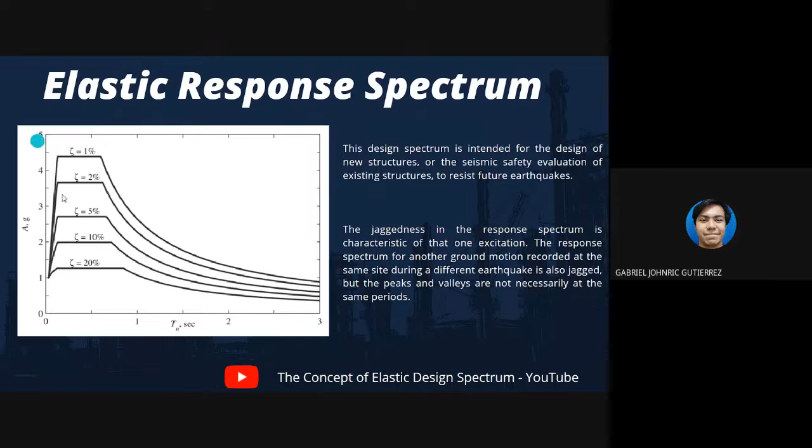So researchers have developed procedures to construct such design spectra from ground motion parameters. The design spectrum should be representative of ground motions recorded at the site during past earthquakes. If none have been recorded, the design spectrum should be based on ground motions recorded at other sites under similar conditions, like magnitude of the earthquake, distance from the site, fault mechanism, travel path of seismic waves, and soil conditions. So the design spectrum is based on statistical analysis of the response spectra for the available ensemble set of recorded ground motions. Statistical analysis of this data provides the probability distribution for the spectral ordinate, its mean value, and its standard deviation at each period Tn.

Kumbaga, sinasabi lang, kung walang na-record na design spectrum sa isang particular site, you should consider these conditions para makapagkaroon ka ng similar or parang simulation na magiging design spectrum na kailangan mo i-consider pagka ikaw ay magde-design ng seismic resistant building. So we should take into consideration these 5 similar conditions. Keep this in mind.

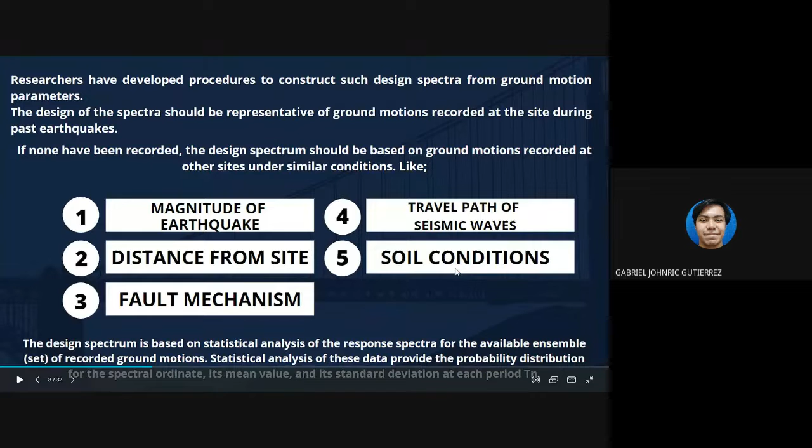Moving on, modern methods for the construction of EDS, or the elastic design spectrum. Modern methods for constructing design spectra are based on probabilistic seismic hazard analysis, which considers the past rate of seismic activity on all faults that contribute to the seismic hazard at the site, leading to a uniform hazard spectrum.

So moving on, the use of elastic design spectrum provides the basis for calculating the design force and the deformation of single degree of freedom systems to be designed to remain elastic. For this purpose, this design spectrum is used in the same way as the response spectrum was used to compute peak response.

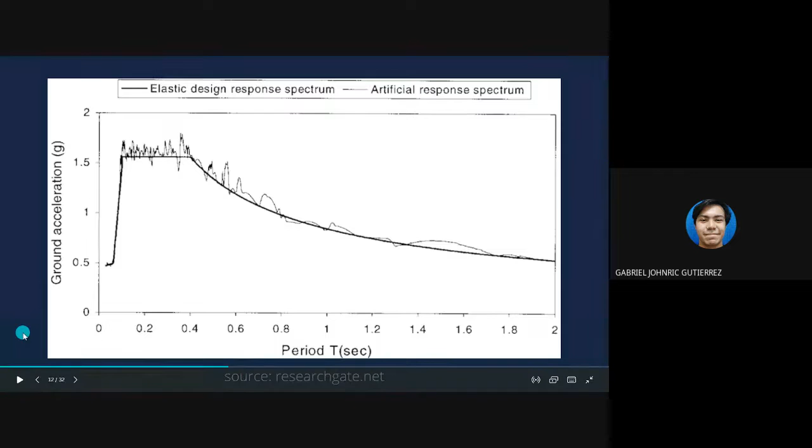Furthermore, ito nakita ko lang sa Facebook pero parang maganda siyang gamitin, galing siya sa Philippine Institute of Volcanology and Seismology or PHIVOLCS. Ito ay nangyari nung nagkaroon ng parang mini earthquake sa Taal Volcano, baga volcanic earthquake siguro. So records of seismic waveform, the left; the frequency spectra, the middle; and the frequency distribution, right - of the phreatomagmatic activity from 11 of 16 seismic stations on Taal Volcano.

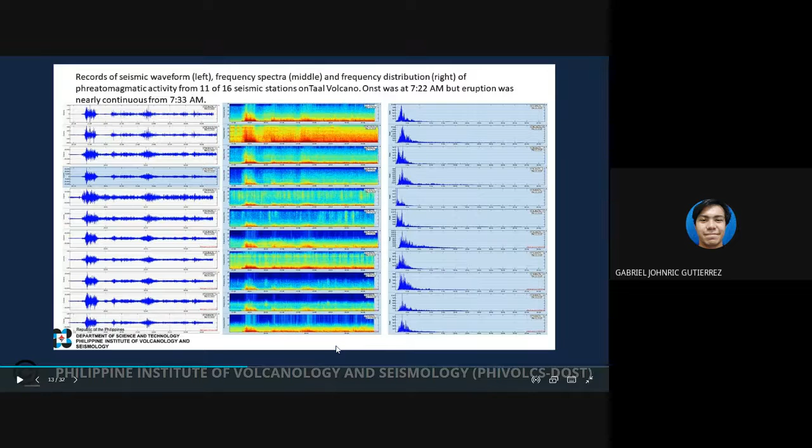Occurred at 7:22 a.m. but the eruption was nearly continuous from 7:33 a.m. Kita niyo naman sa screen na ito yung artificial natin or the response spectrum - i-analyze mo lang yan. Ito ay yung frequency spectra, nasa gitna. Ito, yan, yung seismic waveform natin. Kumbaga importante siya sa design natin ng buildings - i-take and consider natin yung mga record ng past earthquakes, yung mga pwede rin pang future earthquakes, pwede natin ma-predict. This is an example of the frequency spectra, tapos ito yung frequency distribution.

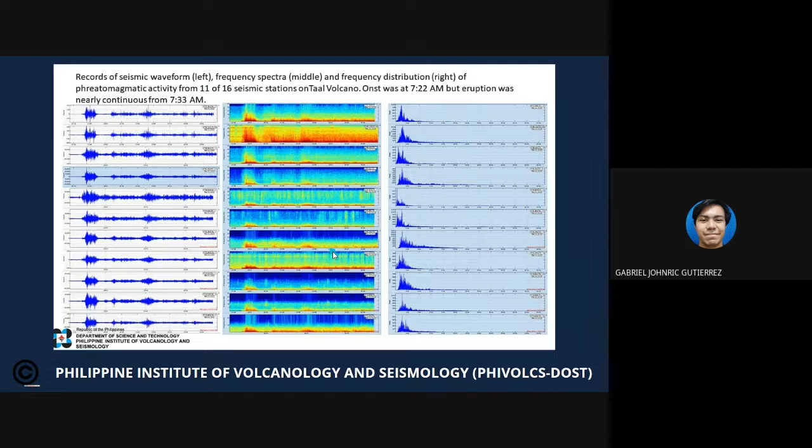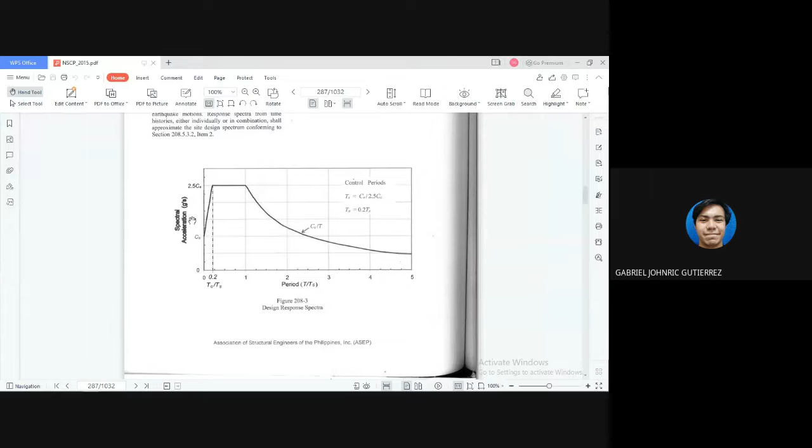Bago ako mag-move on dito sa inelastic spectra, kumbaga yung elastic design spectra or response spectrum, makikita din natin sa ating NSCP 2015. Sana nandyan pa kayo. Saan ba yun? Ayan, NSCP 2015, yan, the design response spectra, spectral acceleration - yan yung sinasabi ko kanina. Ito lahat i-consider natin pag magde-design tayo ng seismic resistant building.

Sa mga time history analysis na discuss ng previous group - mga time history analysis, earthquake loads, yan, i-consider natin to. Meron din mga ganito, pag kailangan natin i-consider... ano pa ba? Saan yun? So yan, yun lang muna.

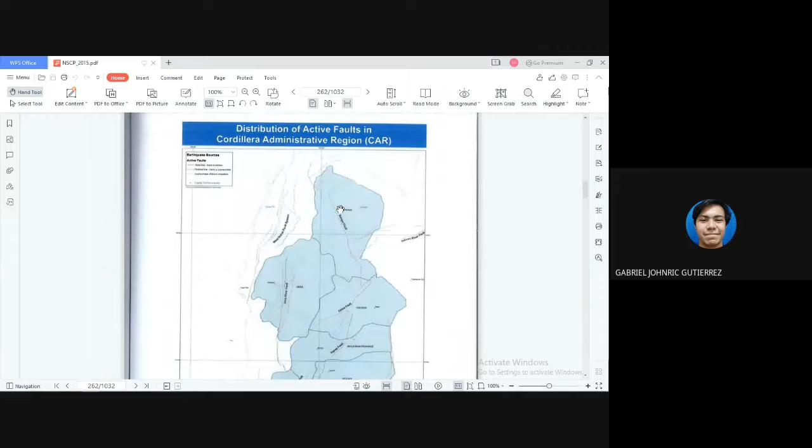Ito pala, baga nasa NSCP na din natin yung mga active faults natin sa buong Pilipinas - distribution of the active faults and trenches in the Philippines. Medyo malabo siya pag naka-zoom out, pero pag ganito yung inisa-isa per region, mas makikita natin, diga, at may legend naman dito. Hindi ko alam kung ano pasa dun. Ito sa region 1, tapos region 2. So puntahan natin yung ating region.

Ayan, region 4A, yun ang Batangas. Di ba lagi naman natin naririnig yung Lubang Fault, diga - pagka nagkakaroon ng lindol malapit sa Calatagan, sa Mabini, diga. Ayun yun ang Batangas City, maliit lang, ayun ang Taal. Ito naman sa region 4B, baliktad nga lang. So region 5 and so on and so forth.

Para to further discuss ang ating discussion, magpe-play ako ng video na ni-record ni Regine Panganiban. She will be talking about ano nga yun - the inelastic design spectra.

Inelastic response spectra or... So rinig nyo ba? The inelastic response... Medyo mahina, pero rinig naman. Sige, salamat. Mahina nga talaga. Oo. I-ano mo muna.

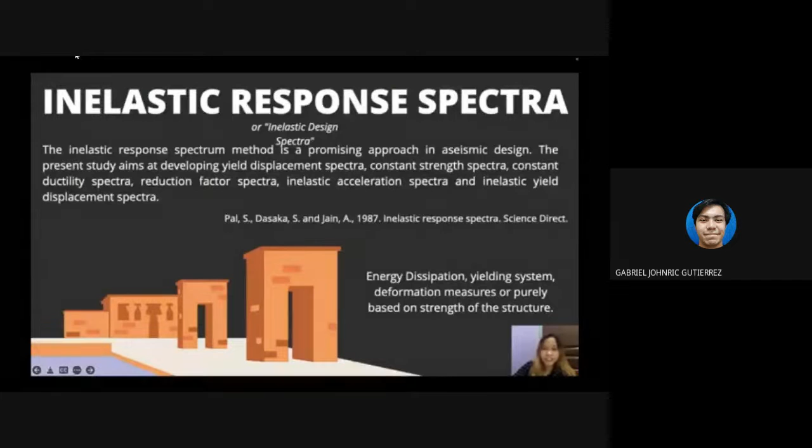Inelastic response spectra or inelastic design spectra. The inelastic response spectrum method is a promising approach in aseismic design. The present study aims at developing yield displacement spectra, constant strength spectra, constant ductility spectra, reduction factor spectra, inelastic acceleration spectra, and inelastic yield displacement spectra.

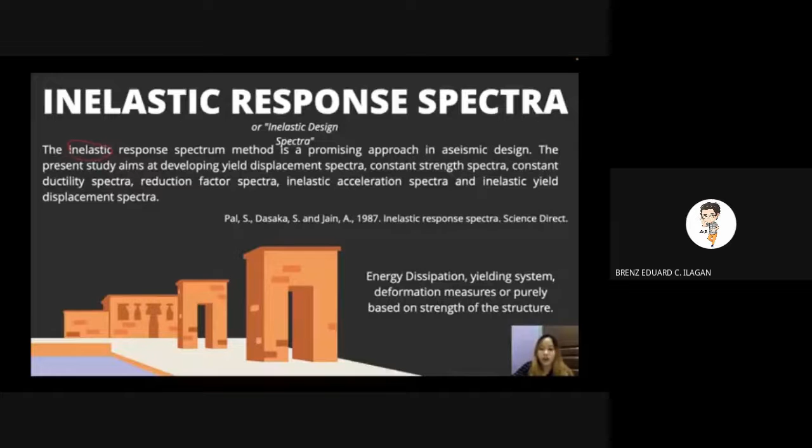So, inelastic defines the material response in relation to the stress-strain diagram that is nonlinear and that retains a permanent strain and does not return to an unstrained state on complete unloading. So next is the basic design objective of seismic resistant design. First is to protect the life safety of the building occupants and the general public. The second is to control the severity of damage in small or moderate earthquakes.

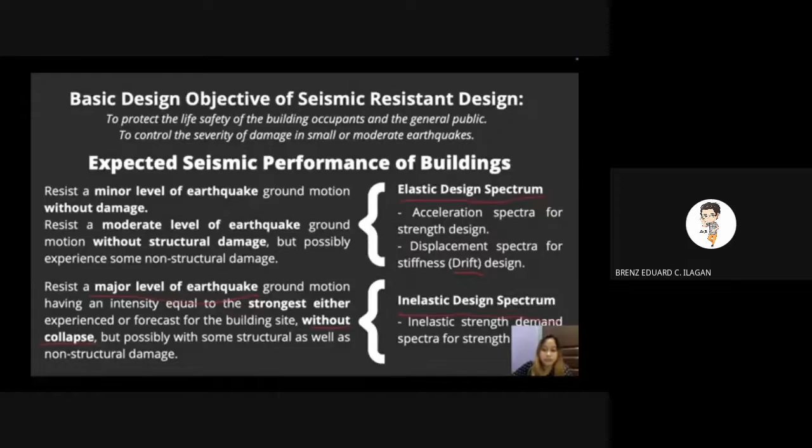So VB in this graph is the peak base shear of the linear elastic system under strong ground motion having a PGA equal to 0.4g. So, starting at the point PGA equals 0.4, the solid black line represents the elastic design spectrum. So, VB is for the linear elastic system under that design earthquake. We normalize VB, sometimes called the base shear coefficient. VB is also called FSO, or F0, which is the elastic force.

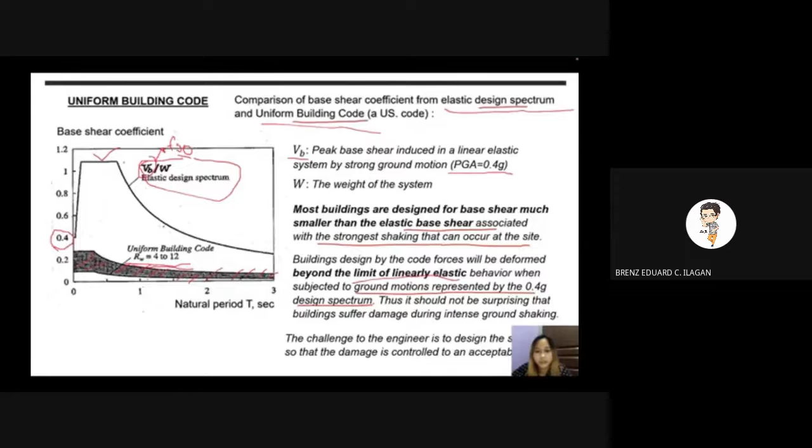Force deformation relationship. During an earthquake, structures undergo oscillatory motion with reversal of the deformation. So, the earthquake excitation will be cyclic, so the structure undergoes cyclic deformation; the effective earthquake forces will be changing direction, and therefore the structure will be undergoing oscillatory motion.

So in an experiment, we apply cyclic force by push and pull on the structure, and then record the force deformation behavior at each step. And para po maintindihan ng behavior, to understand the force on the structure during a real earthquake excitation. So this kind of experiment, sometimes called the cyclic load test, is used for formulating different force deformation behavior, or pagkakaiba ng elements.

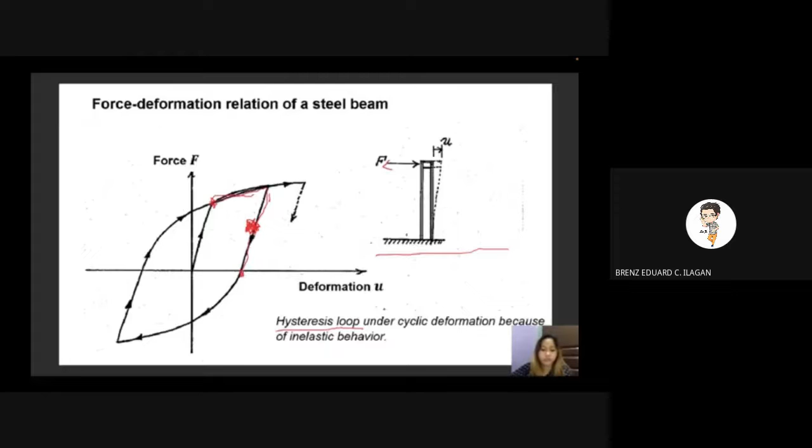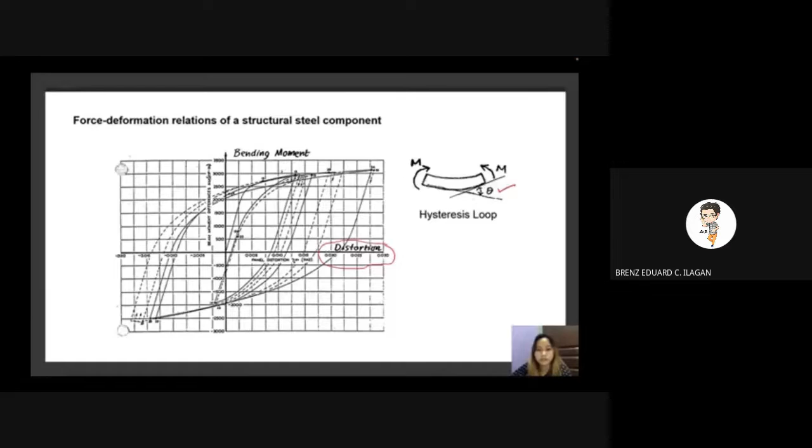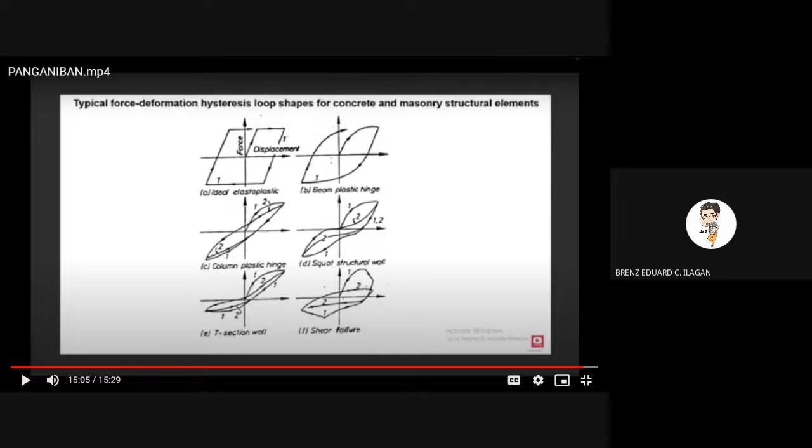So, so yun, wait lang ha. Wait lang po. Sorry. So, dagdagan ko lang yun, sinabi ni Regine.

Wait lang. Dito, so the basic design objective of seismic resistant building design. So, pinaka main concern natin is to protect the life and safety of the building occupants and the general public, and to control the severity of damage in small and moderate earthquakes.

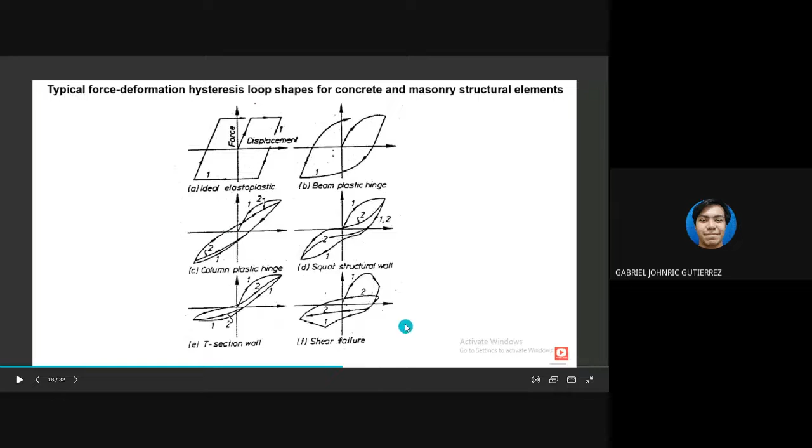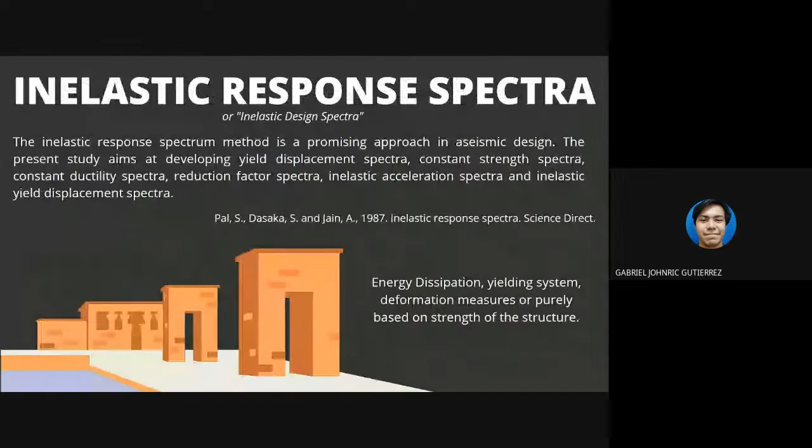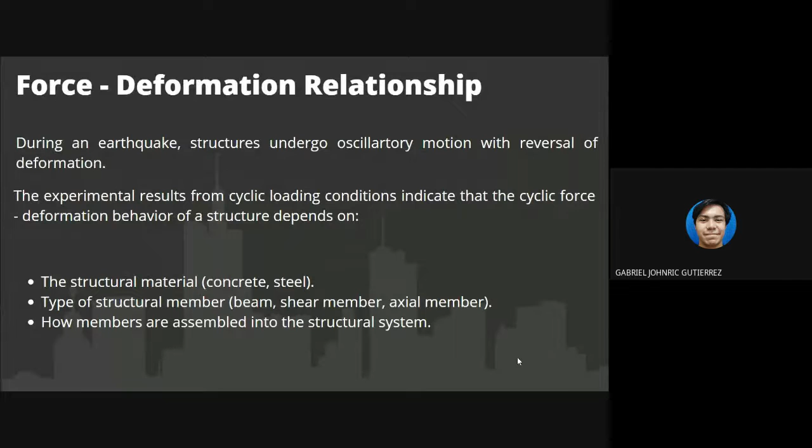Wait lang. Lang po. So yan, so far may tanong ba kayo sa inelastic design at sa elastic design bago tayo magpatuloy? Medyo wala naman, naintindihan namin yung lessons. Yun. Sige, thank you. So, wait lang po. Saan yun? So, ngayon, to discuss the elastoplastic idealization, may I call on Miss Acil to discuss? Miss Acil, nasan dyan ka ba? Sa design option pa ako. Sorry naman. Yan, sige. So, elastoplastic idealization. So, sorry for the inconvenience.

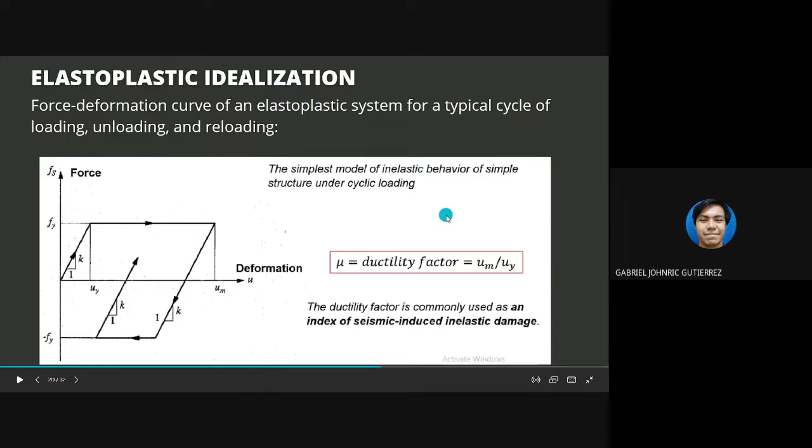So, elastoplastic system and its corresponding linear system having the same K in their initial loading phases. So, yan. Ganito yung diagram ng elastoplastic system. Nagkaroon lang siya ng additional na U sub O. Yun yung corresponding linear system.

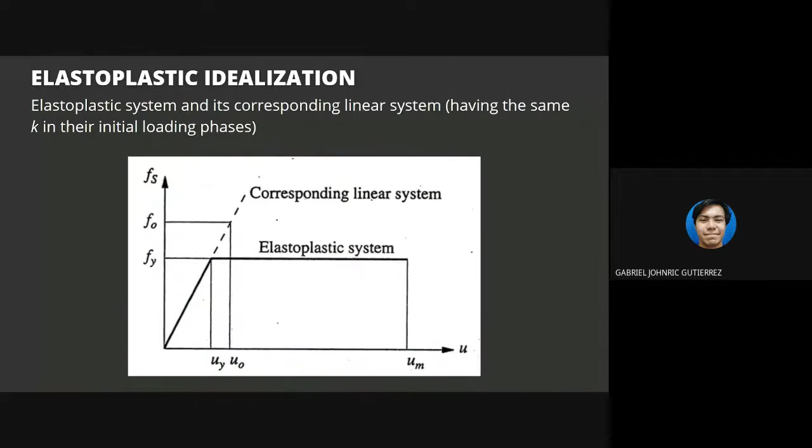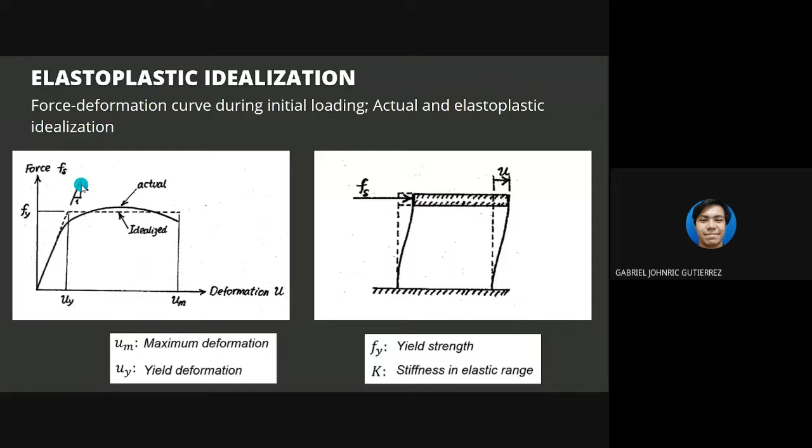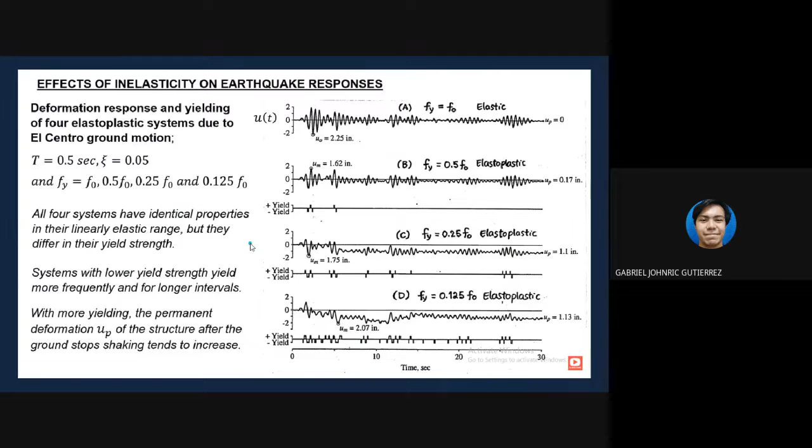For each system, the computed ductility factor μ is the ductility demand imposed on elastoplastic systems by the ground motion. The system should be designed such that its ductility capacity, or the ability to deform beyond the elastic limit, exceeds the ductility demand. So decreasing yield strength, increasing ductility demand. So ganun lang yung kanyang concept.

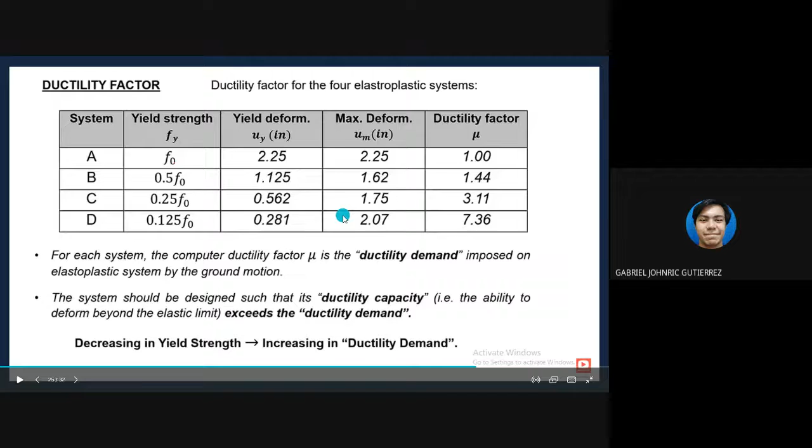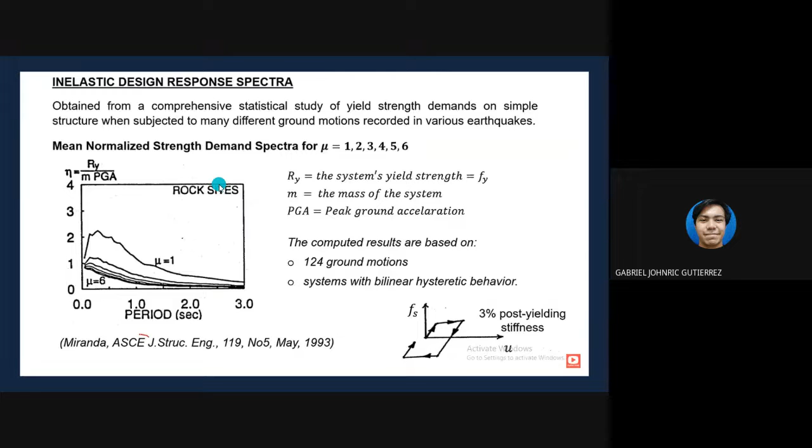So, ito ang period. Dini naman. So design options. A structure may be designed for earthquake resistance by making it strong, by making it ductile, or by designing it for economic combinations of both properties. Ito ay i-discuss ni Miss Aisyl.

So, ayun po. Proceed po tayo sa design option. So, the structure may be designed for earthquake resistance by making it strong, by making it ductile, or by designing it for economic combinations of both of these properties. So, makikita natin na kapag yung mu or yung ductility natin is nag-increase, yung required Fy niya, which is yung yielding strength niya, is magde-decrease. So, meaning, yung structure can be more ductile, yung required na yield niya ay bababa lang. So, we can have economic combination of both properties for any given structure para makagawa tayo ng design.

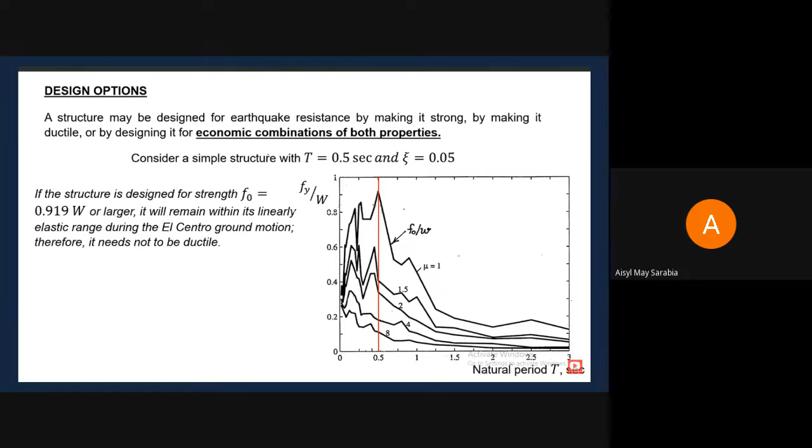So, for example, consider a simple structure with period equals to 0.5 seconds and damping ratio equals to 0.05. So, if the structure is designed for strength F0 equals to 0.9 W, it will remain within its linearly elastic range during the El Centro ground motion. Therefore, it need not be ductile. So, kaya makikita natin na yung mu is equals to 1. Hindi na kailangan ng structure to be ductile kung iseset natin yung Fy to 0.9 W.

So, on the other hand, yung structure can develop a ductility factor of 8. Sabihin natin na yung structure ay gawa sa pagka-ductile na material na kaya masustain yung ductility value of 8. Tingnan natin yung mu is equal to 8. Makikita din natin na yung need na yield strength niya ay very low. So, meaning, ductile structures, their yield strength demand is less. So, structure can be economic combination of the ductility and the required yield strength also.

For example, if the ductility is equals to 2, we can design it with the required yield strength of 30% of F0. So, we can design our structure for high yield strength that doesn't need to be ductile, or more ductile with less yield strength, or economic combination of both properties. Next is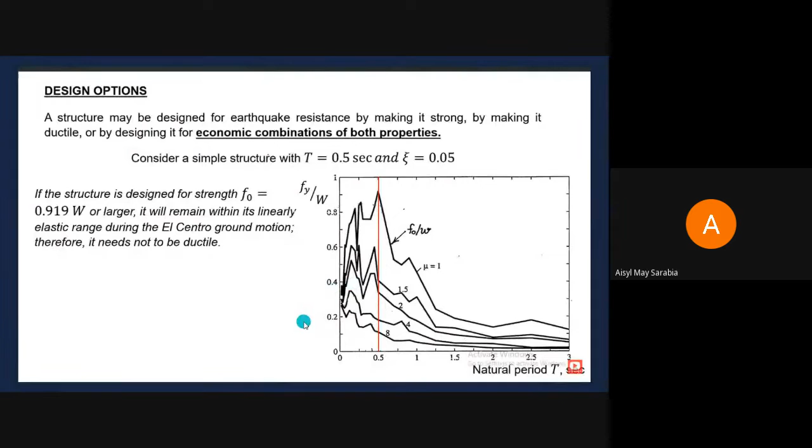normalized strength Fy of elastoplastic system. So, yung top line is for elastic structure. Yung mu is equals to 1 means that the structure will remain elastic. But if the structure has capacity of mu equals to 2, the Fy over F0 will be reduced to 0.5 or less than that. So, for high ductility ratio, yung mu natin is equals to 8, the required yield strength is even less than what is required to remain elastic. Also depends on the initial period.

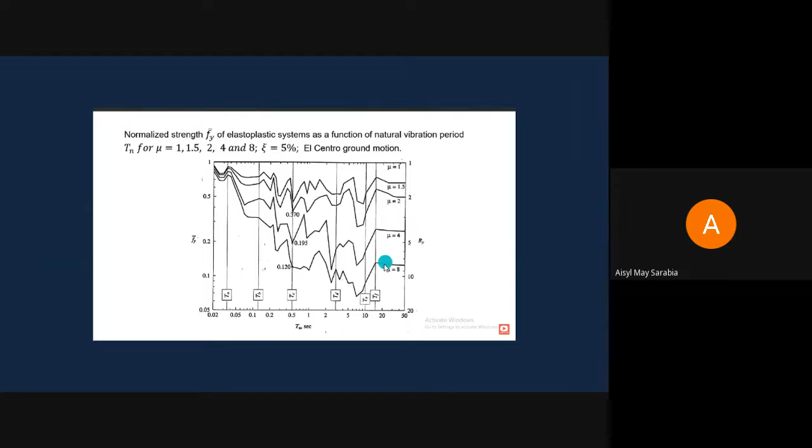Next slide. So, inelastic design response spectra. So, makikita natin na the same procedure for different ground motions, different structures, and different periods is repeated to obtain ductility spectrum. So, this uses 124 ground motions, system with bilinear hysteretic behavior and 3% post-yielding stiffness. This is plotted for different levels of ductility, which is 1, 2, 3, 4, 5, 6. And you can see

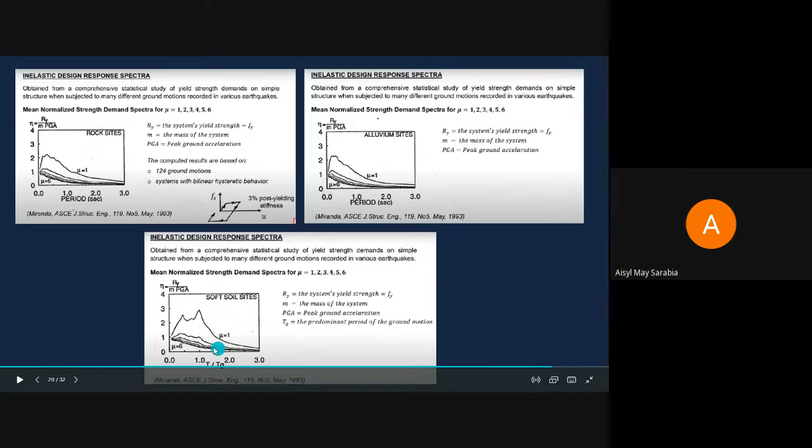the Ry is equal to the system yield strength, and it is normalized with the mass of the system and peak ground acceleration. So you will have the factor of Ry, and for different levels of ductility, you can see the lines. This is for the rock sites, and the process for the ground motions recorded in alluvium sites, tama ba, and soft soil sites is also repeated for constant ductility spectrum. Next slide.

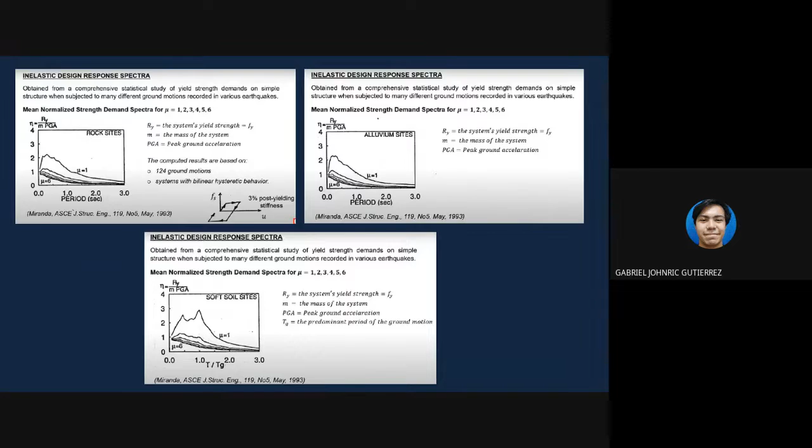So this video is a summary, it talks about the inelastic and the elastic response spectra. So, sit back and watch the video.

What I wanted to do today is talk about inelastic spectra and take you on a tour of the different aspects of inelastic spectra. I have many slides, this is something I've been working on, I've put a lot of ideas together. So I'd like to introduce you to the different concepts in inelastic spectra, and give you a little insight into the experience I've had with them. This is kind of my perspective on what we're doing, and I really want to emphasize that it's important.

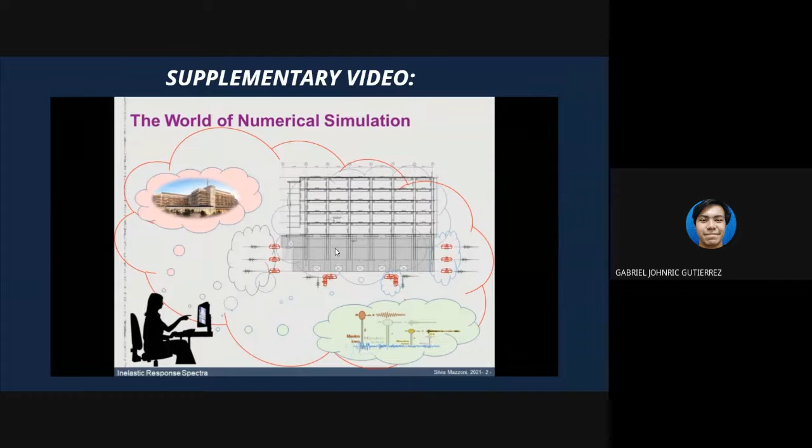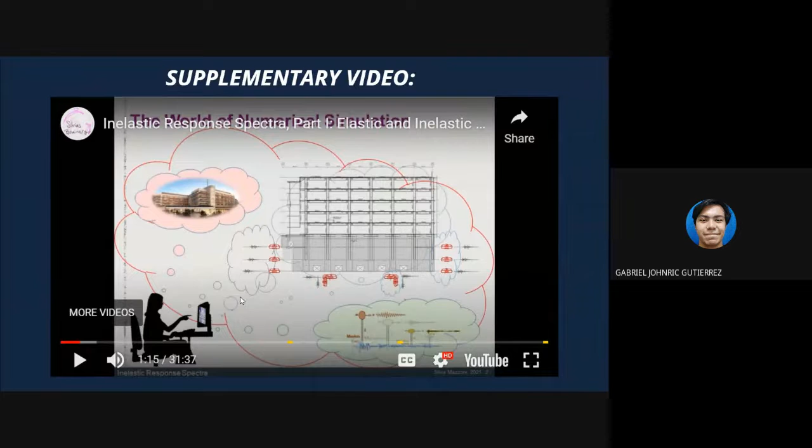May sound ka po. Meron naman, naririnig namin. Sige, wait lang.

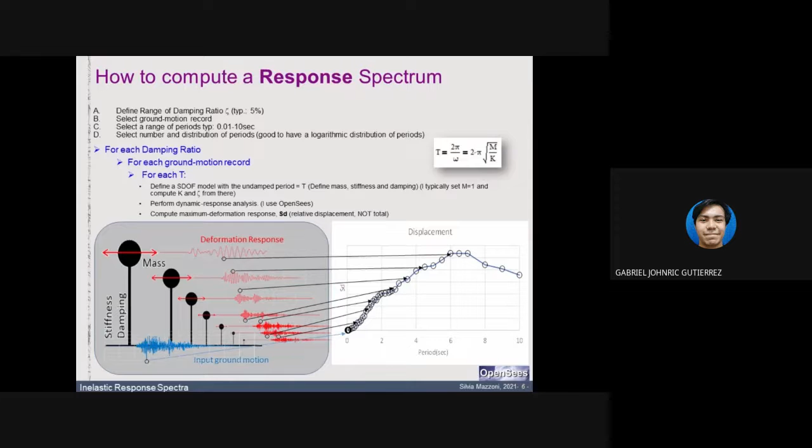The way we compute it is you pretty much write a loop. This is very easy to do in OpenSees, you just build single degree of freedom systems and vary different damping ratios. Typically we're only looking at 5%, but most of the time we're actually looking at a lot more damping levels, or you pick a particular one. We pick a certain ground motion or set of ground motions, and then we just literally run a time history response analysis on that single degree of freedom system. We pull out the maximum response, the maximum absolute value of the response, and plot it as a function of period. And so from that, we get the spectral displacement.

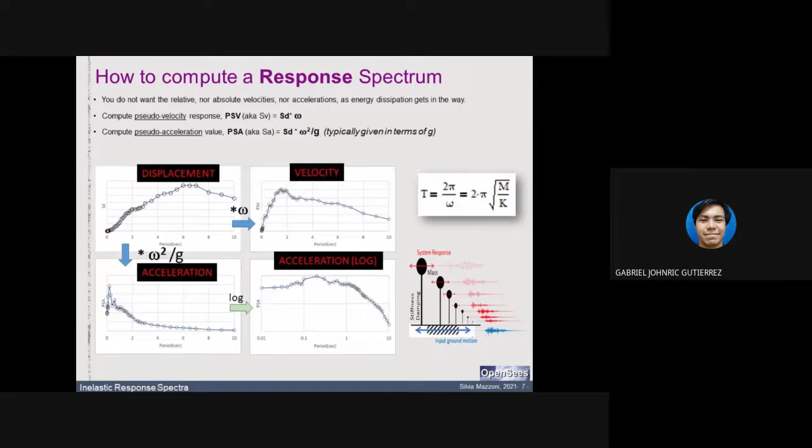Typically in elastic response spectra, we then take that displacement and convert it into pseudo acceleration and pseudo velocity. It's important that we're looking at these pseudo quantities, not the total acceleration, because what we're really interested in, as structural engineers, is responses associated with deformation. Also, you don't have all this kinetic energy and damping energy that's really difficult to separate. So what we're looking at is the PSA, the pseudospectral acceleration, computed from our displacement response spectrum. Why am I making a big deal of this? Because it's going to come into play when we look at inelastic response, where we have to step back and look at displacement.

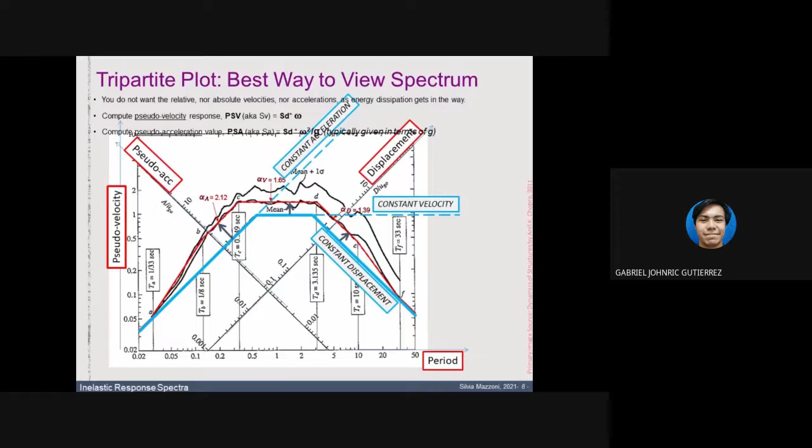I wanted to show you a quick demonstration of this in OpenSees. This is what we're actually doing when we do our single degree of freedom analyses. I run it with a lot of them, and what you see on the top right-hand side is the response, same ground motion, different periods and characteristics. Here I'm just showing you as a height. You get different maxima, different frequency content, and it almost looks like the higher frequency ones, the stiffer structures—not necessarily stiffness, because there's also mass associated with it—you almost don't see the deformations, which is an important feature of stiff structures. Just because you don't see the deformations doesn't mean they're not there, and the forces may actually be more important.

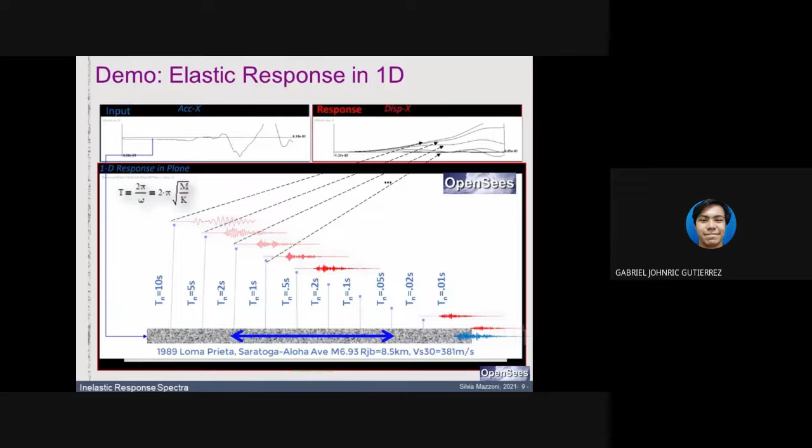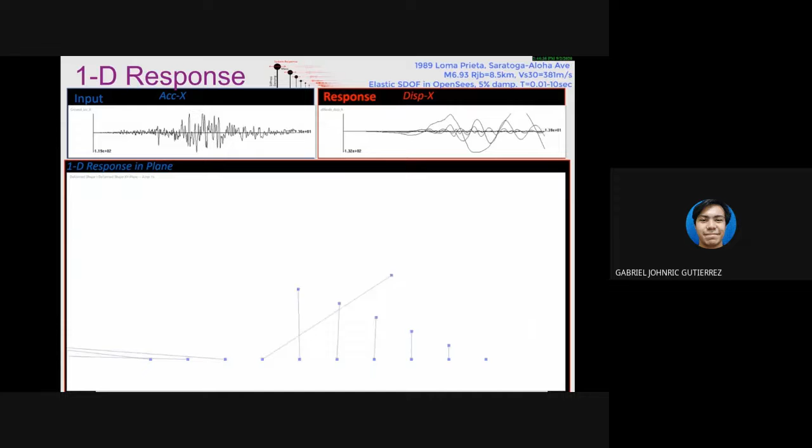So that was the demonstration there, just to give you an idea.

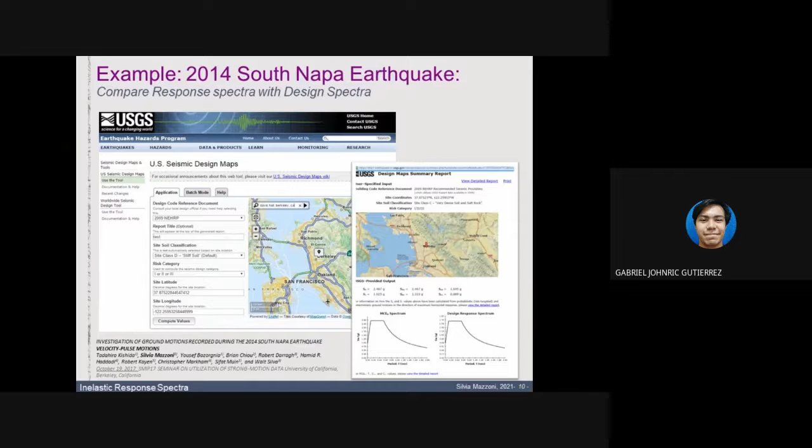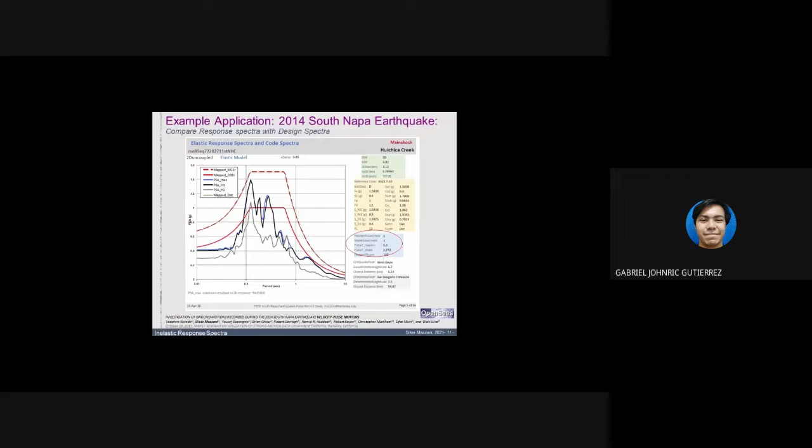What we often do is take elastic response spectra and compare them to the design spectra for your site. Remember, you've got a ground motion, but you also have, at a certain site, a certain level for which structures are designed. It's neat with elastic response spectra when you plot those against the design spectrum. This is a project we did after the South Napa earthquake. We're looking at comparing the spectra in the two directions, H1 and H2, handled individually, and comparing them to the design spectrum. By doing that comparison, you could see that structures in the period range between maybe 0.1 second to half a second are expected to exceed the design level, while structures in other period ranges are not expected to.

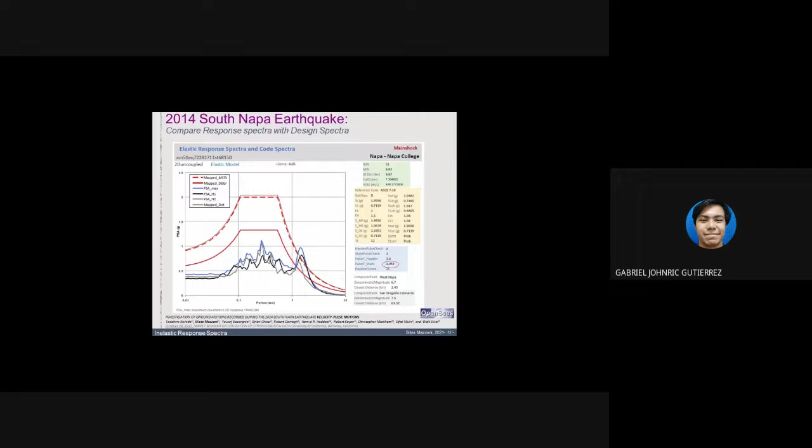But for the same earthquake, at a different site, you may have a different design spectrum as well as a different response spectrum. Therefore, in this case, structures in a different period range are affected. And then maybe you're far enough away that you're far from your design spectrum entirely. It's interesting, and I'm focusing on this because I think it's important to understand what the response spectra are doing, especially when we start with something familiar, such as an elastic spectrum.

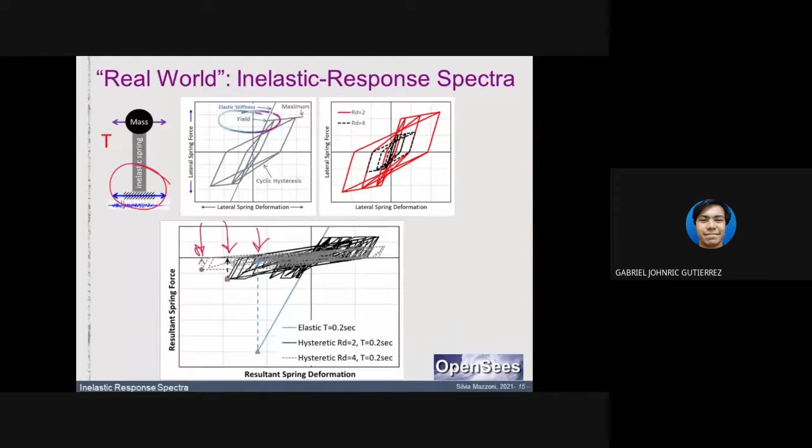And so that's it, that's easy—elastic response spectra are relatively easy. When you get into inelastic response spectra, now you're looking at the inelastic response of your structure. You've got energy dissipation, yielding in your system, and that leads to a difference in response, just purely based on strength. You may have the same initial properties, so your elastic response spectrum will give you the same values, while if you actually subject it to a nonlinear analysis, you'll see different maximum displacements depending on the strength of your structure. I'm going to give you a little demonstration of that.

I'm big on demonstrations. So now, still in 1D, these are structures where the two models are overlaid—the elastic and the inelastic structure right on top of each other—so you don't really see the difference at first. But as soon as the amplitude goes up, with different periods and different strengths, you'll see that as we go into the inelastic response, you start seeing yielding, and the overall response is different. Here we have a soft story effect in the system. This shows that not only different strengths but also different periods will have different responses between elastic and inelastic. Another important feature, which I'll address later, is that at the end you may end up with residual displacements, and those are important. We're able to capture those even in a single degree of freedom system, which I think is pretty cool.

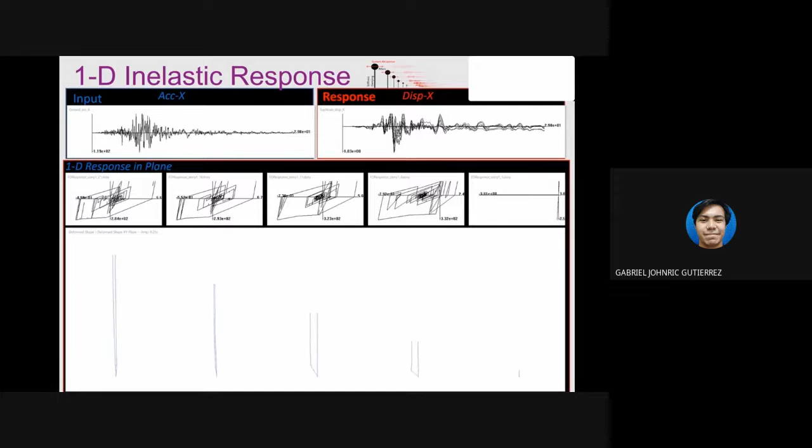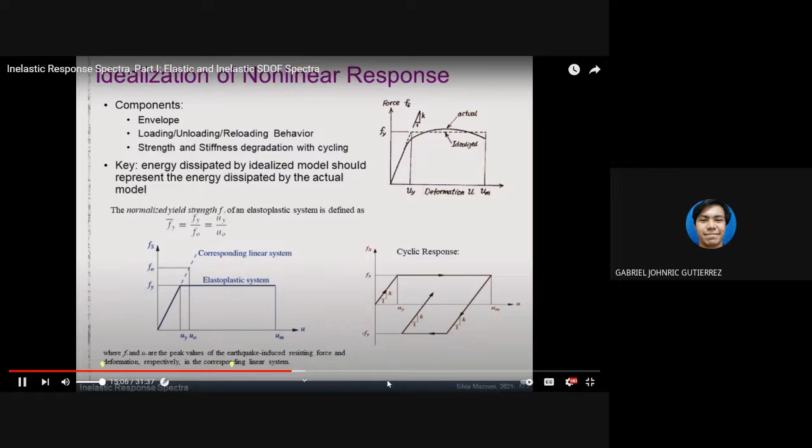How are we going to idealize that single degree of freedom system? We're used to, and we've seen a lot of this, when you just do the simplest resolution: an elastoplastic system. You've got elastic response until you yield at a maximum strength, and then you've got zero tangent stiffness, and you keep on cycling.

It's similar to the behavior I showed you before. Now you've got to take into account what is the envelope. It's not just an elastic stiffness, but how are you going to model this envelope? How do you convert a curve that is curvilinear like this into a bilinear response, elastoperfectly plastic, or more interesting, as I'll show you in the next slides?

You also need to take into account how you're going to model the loading and reloading behavior, as well as the strength and stiffness degradation over time because of cycling. So now the problem has gotten more interesting and more challenging. This is something I want your brain to start thinking about.

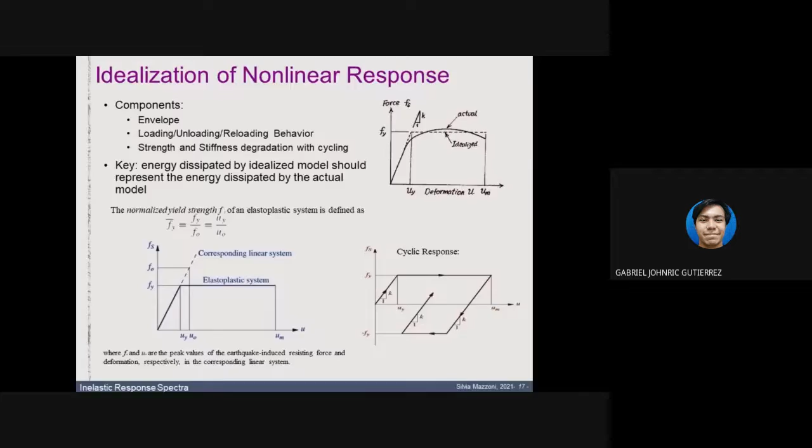It really depends on the type of structure that we're modeling. This is a neat example from Chopra's textbook. It's actually a great resource to start looking at inelastic response.

On the top, you see the forces in an elastoperfectly plastic system, the deformations at the top. In the middle, we look at forces. And the forces, pretty much, they cap at the yield strength.

So now we can't plot spectral accelerations anymore. We actually have to look at displacement. So what we're used to looking at, pseudo PSA response spectra, when we're talking about inelastic response spectra, we're always talking about deformation measures.

I will show you how there's a lot of different metrics we can look at, also the maximum strength demands that you could achieve, that you would need for certain deformation requirements. The other interesting thing you have to take into account and think about in an inelastic response is how many times you go into the plastic range.

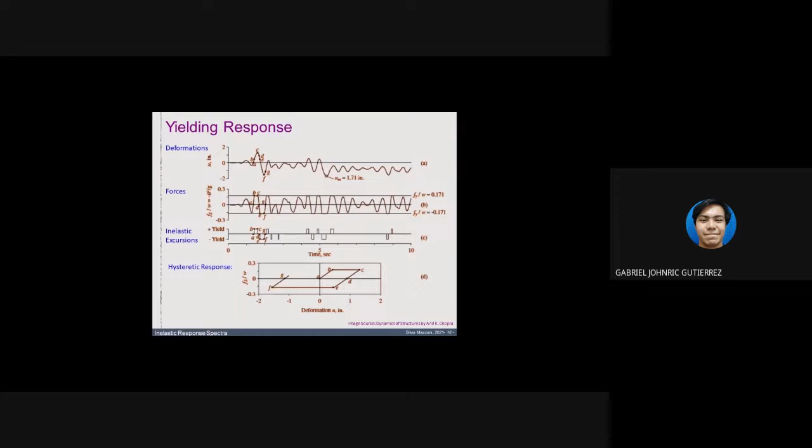So if you look at this plot, which is an elastic system and then weaker and weaker: as we take the yield strength equal to the elastic strength, but now if we reduce our yield strength, we expect our structure to go more and more inelastic. What's interesting is you get more and more residual displacement.

Your displacement peaks are in completely different places. Here was negative, here was positive. Also, the yield count is something that may be important to your structure. It really depends on your structural system and whether that's a metric that's important, but it is something that you can track. You'll notice here, the weaker the structure, the more it's going to go into the nonlinear response.

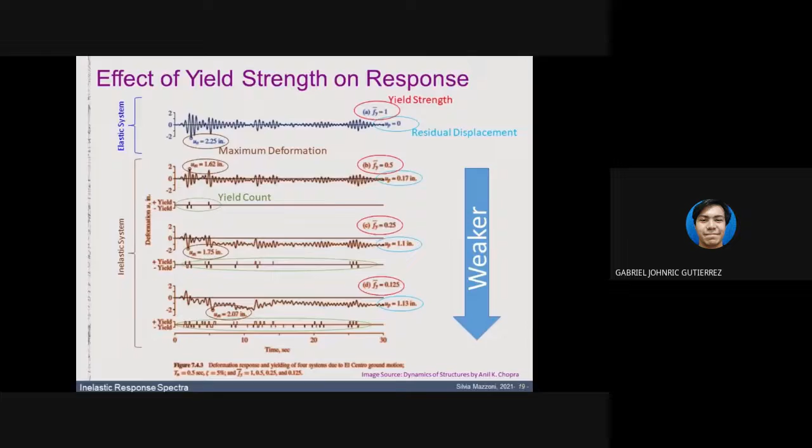That's very important, because the weaker the structure, the more ductile you need to make it, since the ductility demands are going to go up. The inelastic deformations are going to go up. And so that's when it comes in, and now we build these inelastic response spectra.

You've got your model, and this is from Chopra's book, therefore this is a simple, elastic, perfectly plastic system. So we've only really made one additional parameter, which is your yield strength. And now you can really see by just changing one parameter, we get very different responses. The difference in responses really depends on the period of your structure.

You can plot different quantities, and it's very important to think about what quantities and what type of response spectra you want to look at. This one here is purely deformations, the maximum displacement. On the left, it's divided by the ground displacement, or you can normalize it with respect to the elastic displacement. So now you're taking the amplitude of your structure out, the amplitude of your earthquake out, because you're normalizing it by the maximum elastic displacement.

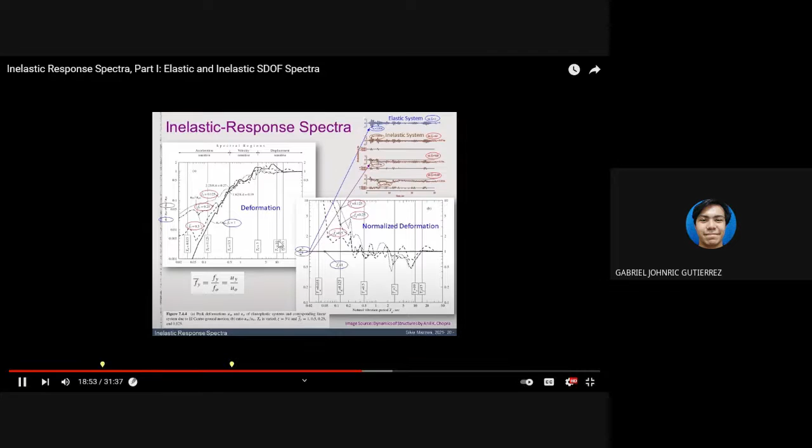So you'll look at these and find these normalized deformations. And look at what's interesting here, and you'll see it here as well: short period structures are very, very sensitive to displacements.

They get really, really large displacements once you have yielding. And it's important because that's a very different type of response than these more flexible structures. And you could almost see it in the little demonstration that I gave you, but in the little demonstration, see these displacement values here, this is logarithmic. These displacement values are much lower than these displacement values for the more flexible structures.

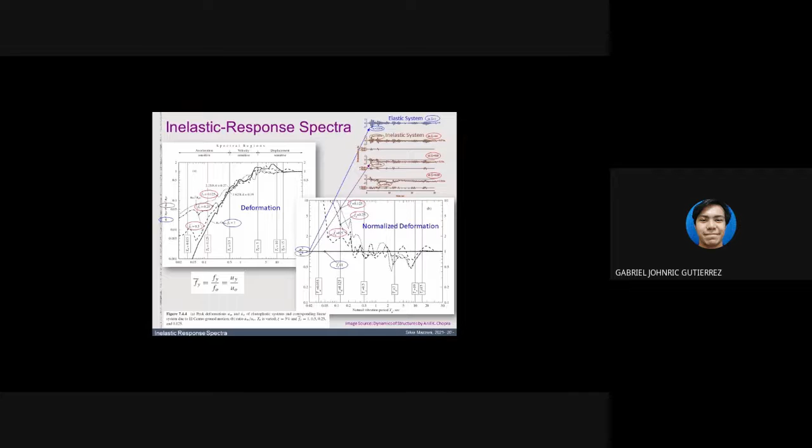But if you normalize it, now you see, hey, wait a minute, my demands are, I expect my lower period structures to be much more affected and more problematic during inelastic response. And so these are two types of inelastic response spectra that you can develop. Another set is when you bring in the definition of ductility. And why is ductility important?

Well, ductility is a good metric of damage, and it's really pretty much the ratio of your maximum displacement divided by the yield displacement. So if your ductility is less than 1, you're elastic. If it's greater than 1, you're inelastic. This is something we all know and take for granted, but it's really, really important in evaluating structures and the information that we get from our single degree of freedom system.

The other thing to take into account when you go into ductility greater than 1 is that now you're dealing with residual displacements as well. And that's a measure that needs to be kept in mind as you do your analysis or evaluate your structural performance. And so now that we've defined ductility, now you're going to find these ductility demand spectra, which is pretty much the step. We take what we had before, which was our maximum displacement demand, but instead of dividing it by our elastic displacement demand, we divide it by our displacement capacity.

Okay, and so now this is proportional to, if you have a very short period structure, the deformation capacity is going to be small compared to a long period structure. And so it's a much better normalization now of these amplitudes. But again, if we plot, these are the different strengths. So Ry, remember I had told you before, Fy is the ratio of the yield strength to the elastic demand. And so the inverse is, the weaker the structure, the higher the R ratio is. And so as you weaken your structure, your ductility demands go up.

And so it's very important when we're looking at inelastic structures to make sure at the design end to provide that ductility capacity. So the ductility level is really important in what we're doing, and we're computing our inelastic spectra, because that's what we're trying to communicate to the designer or to our client.

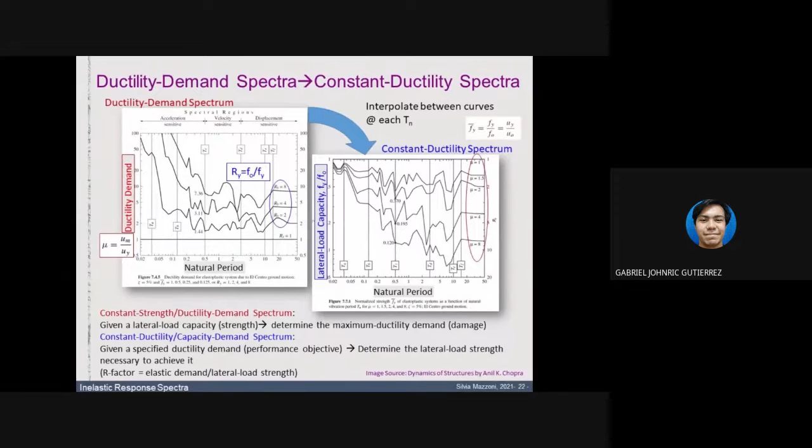The other thing to keep in mind is the effects of damping and yielding. Again, this comes from Chopra, and it's something to think about when you're building your model, what damping ratio you're gonna use. When we have an elastic system, we put in 5% damping, which is also meant to represent energy dissipation. And so when you're modeling the yielding explicitly, the recommendation is to drop your damping ratio. And it's interesting, and that's really the highlight of this sentence, this is a lot of text from Chopra's book, I recommend going to read about it, that damping comes into play right here in the middle region.

In longer period systems, you've got large deformations, and therefore it's really your hysteretic damping, as well as in your short period. And so damping is really important in this middle range. So don't disregard it. But even going from 2, doubling to 5 to 10% damping, your changes are only 5 to 10% in response, or actually no, because this is logarithmic. So it's important. And the moral of the story is kind of cool: Chopra is making the point that you've got to take into account damping, and it's not so easy.

We can't represent hysteretic damping through viscous damping. And so make sure that you're considering both viscous damping to represent viscous damping and hysteretic damping that you're modeling explicitly in your model. And what kind of hysteresis does your model have? The point of it here, and it's really the point that I'm making through today's presentation, is even damping is important. Everything, all the different decisions are important, and you want to evaluate what are the effects on each one.

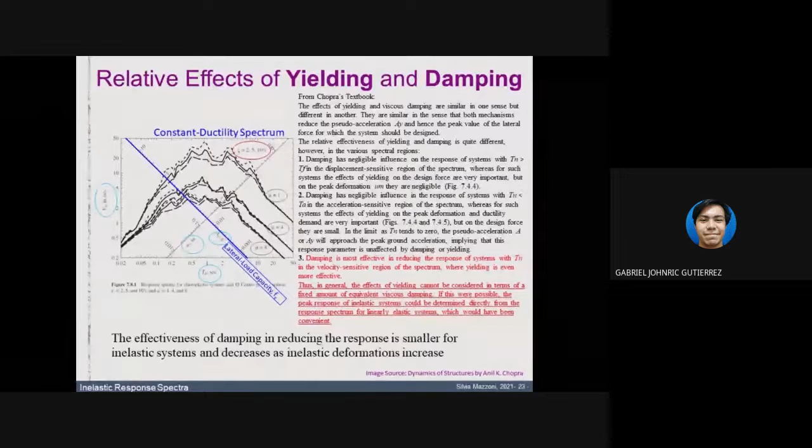It really depends on your ground motions. It depends on your case. It depends on what you're trying to do. Another application in 2010, Professor Bozorgnia with Mahmoud Hachem and Kent Campbell. I didn't know that Kent Campbell was part of this. So they took the NGA West 1 records and built a huge database of inelastic spectra. And that's why I recommend going on the database and then interpolating that data to get to the ductility levels, because then you have that much more data to really play with in the post-processing.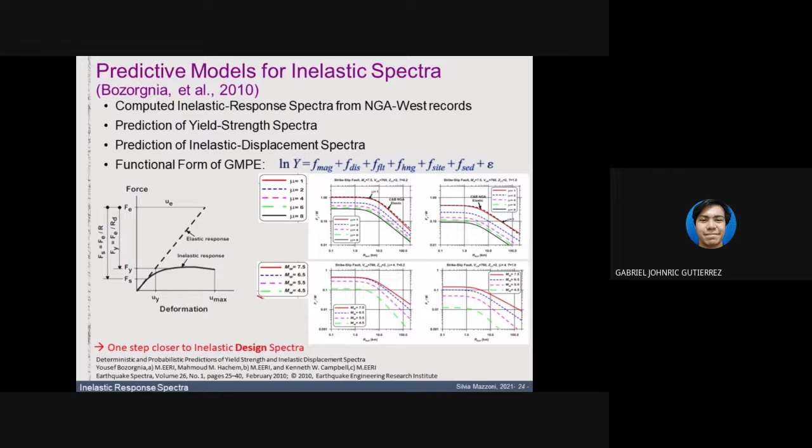So always read what's on the y-axis, okay? Because it's often different, and make sure that you have the definitions there. And in this case, they actually did use 5% damping in the database because they were running the whole range. And so you don't want to have discontinuities when you go from R factor of 1 to 1.5 to 2.

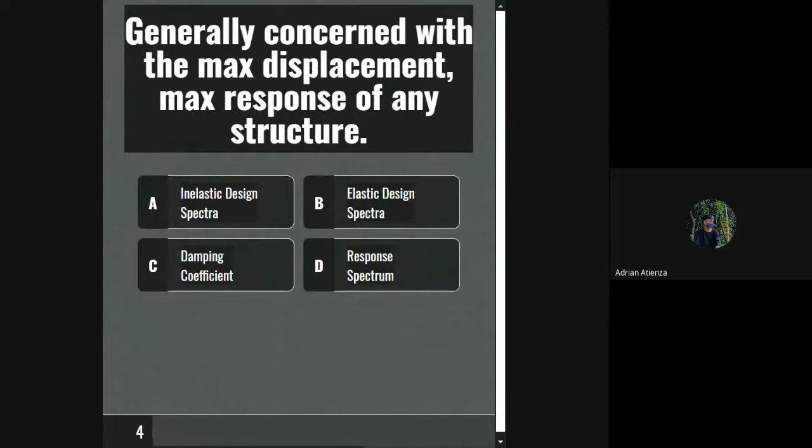Displacement max response of any structure. Correct answer is response spectrum. At tatlo lang po ang nakatama. The best players, meet me. Question. What is one of the three forces which are important in designing or recording a response spectrum? Enter your correct answer po.